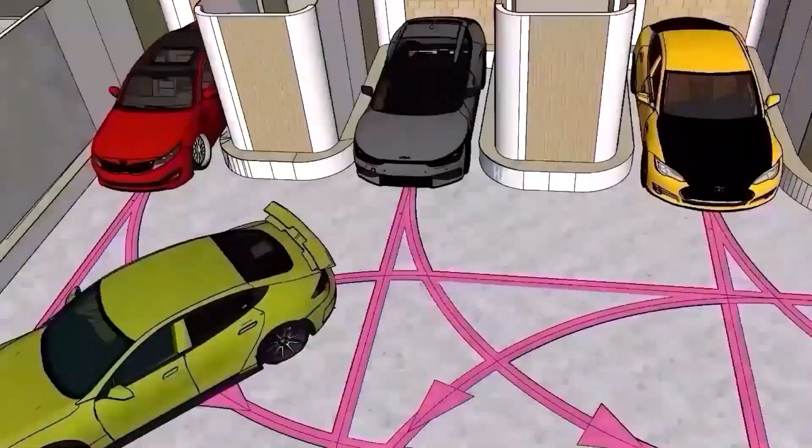A nonstop self-driving car that can solve traffic problems. All vehicles are automatically driven, and when the vehicle departs, they are controlled by the system. The number of people transported per hour is 160,000, three times that of subways.

It runs ultra-high speed in the city center, running 100 miles per hour non-stop through downtown New York. Self-driving cars are in the spotlight as a means of transportation for the future.

Famous companies around the world are scrambling to develop them, but they still lack perfection and lack legal support to determine who is responsible in the event of an accident. Also, even if it is possible to drive fully autonomously, it does not solve traffic problems such as driving fast.

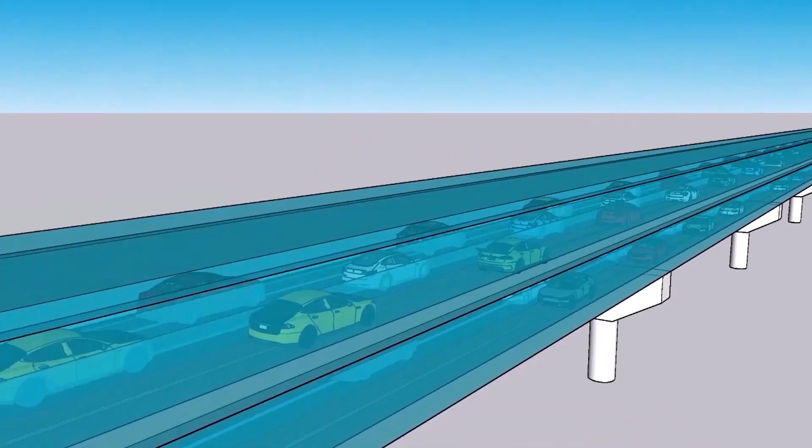However, a new technology has been developed which solves the commercialization of autonomous vehicles in a simple way. Advanced autonomous driving has already established technology. The new technology developed by Korean startup BT researchers is designed to allow autonomous vehicles to pass through dedicated passages with good straightness, and will be the first to succeed in commercializing autonomous vehicles as a technology that can drive non-stop at 162 km per hour, high speed in the city.

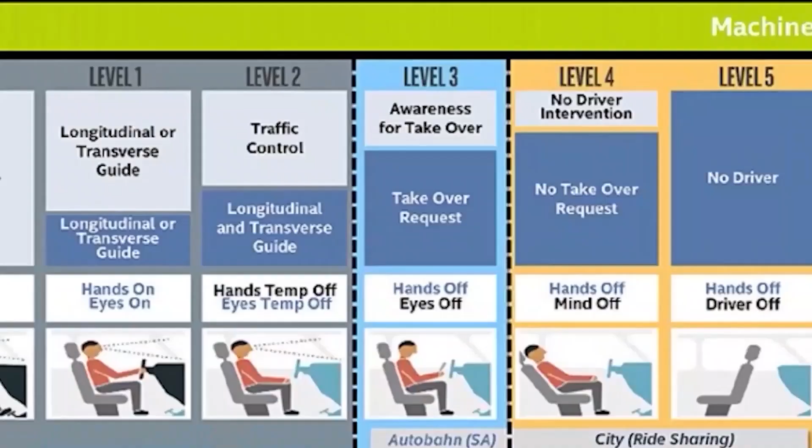The dedicated passageway to be built in the center of a large city is in the form of a tunnel, and there are few obstacles due to the closed top, bottom, left, and right. So autonomous vehicles with 4 stages of autonomous driving are operated at non-stop high speed.

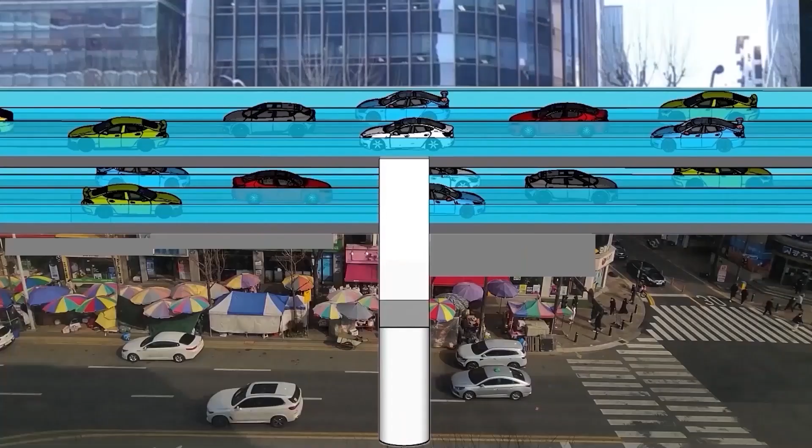Thousands of self-driving cars travel at non-stop 162 km per hour speed, transporting more than 100,000 people per hour on the dedicated passageway in the city center, commercializing self-driving cars.

Vehicles and populations in large cities have reached saturation, causing severe urban traffic difficulties. Can we solve traffic problems forever? Non-stop 162 km per hour in the city center.

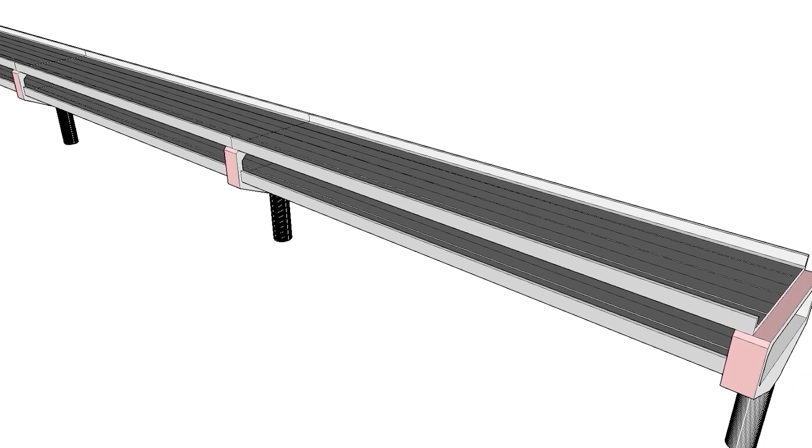Instead of the subway, a 2-story highway is built in the city center. The crossing directions are placed on the upper and lower floors, respectively.

In the city center, non-stop high-speed driving will be carried out at high frequencies. Cars that used to run at high frequency diverge to the branch line, stop, and get on and off.

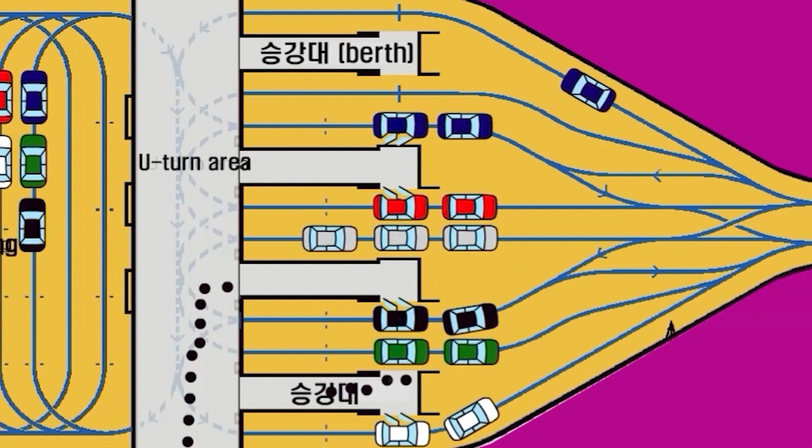Collisions and congestion are blocked in advance with artificial intelligence computers. Passengers get on the parallel platform and depart sequentially. Cars departing from the distributed terminal gather on the main line and operate at high frequencies.

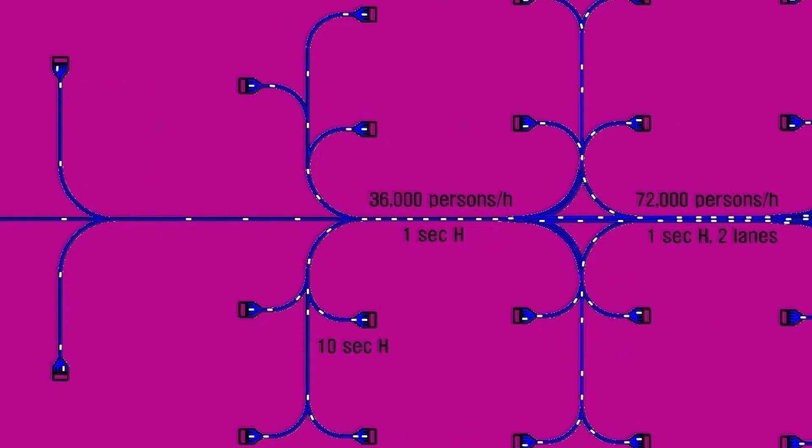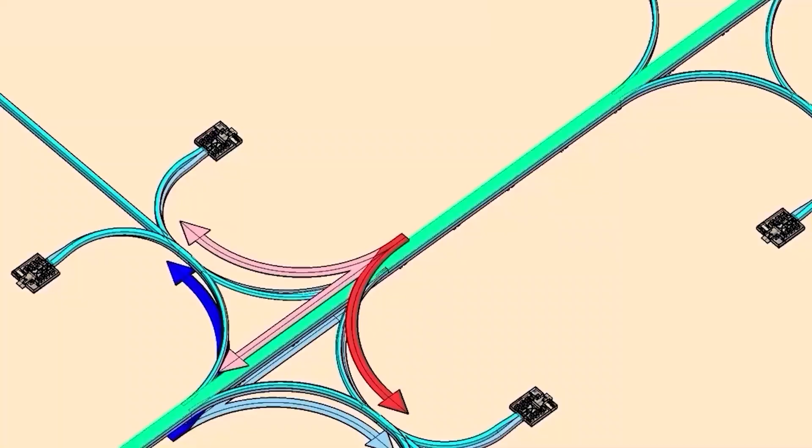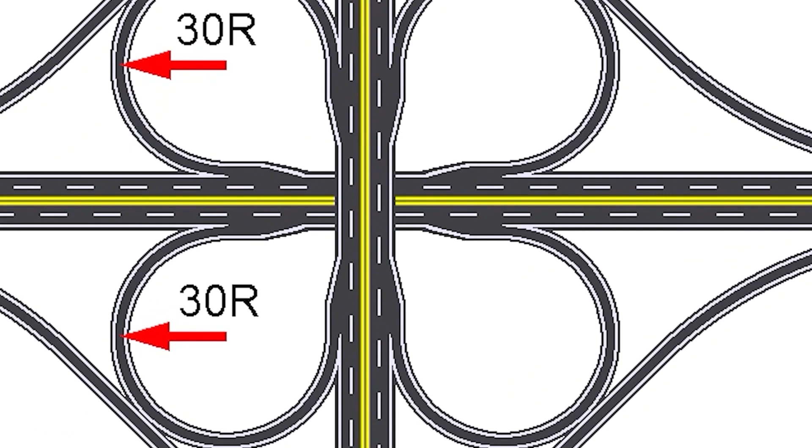The large interchange of the highway occupies a large site and cannot be installed in the city center. But the structure that is easy to turn left allows a large turning radius of the connection road, and the BT 2-story road can reduce the interchange by more than 20 times, enabling urban installation.

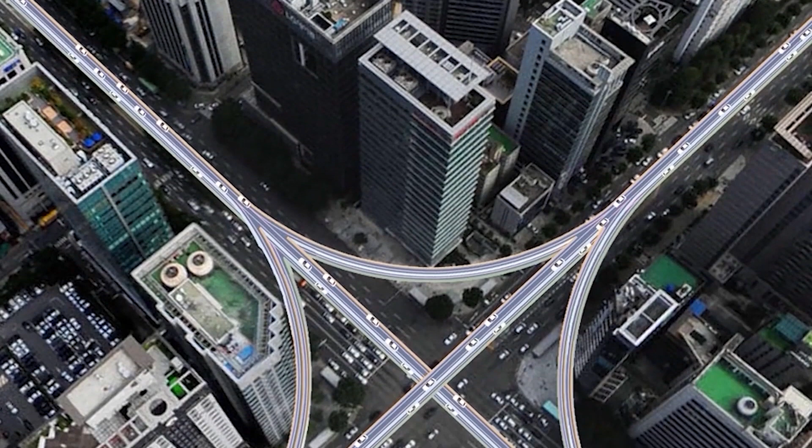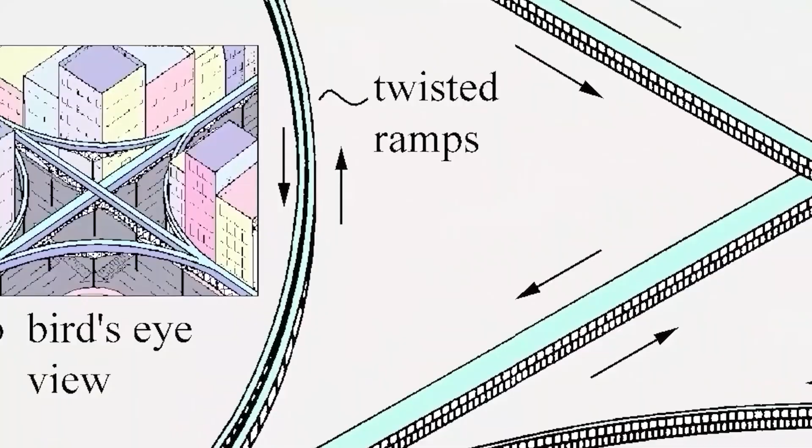BT installs a diamond-shaped intersection that fits perfectly into the intersection of the city center. Along the wide road in the city center of a large city, a 2-story road with many intersections is built as an elevated or underground road.

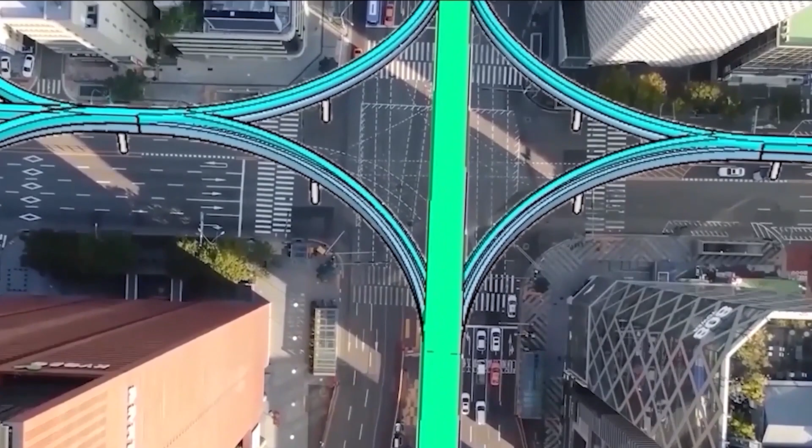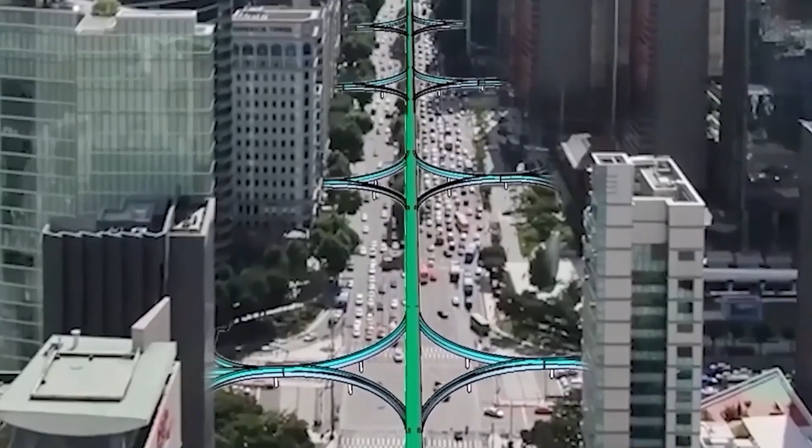Interchange with a large turning radius enables non-stop high-speed driving in the city center. All BT's cars will be operated as self-driving cars, and self-driving cars will be able to drive non-stop high speed in the city center.

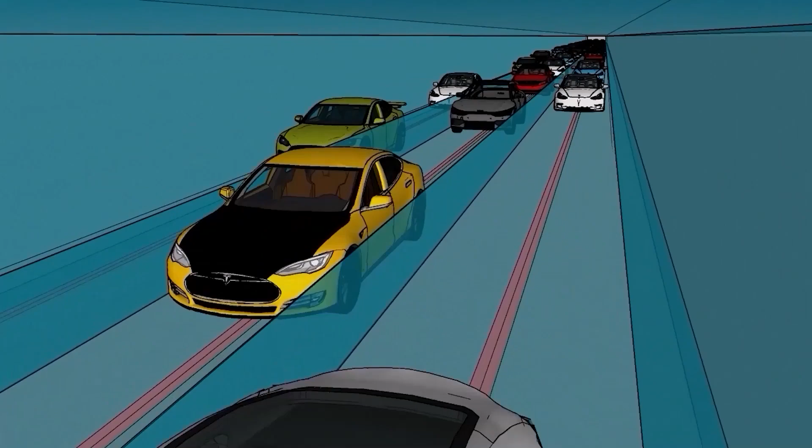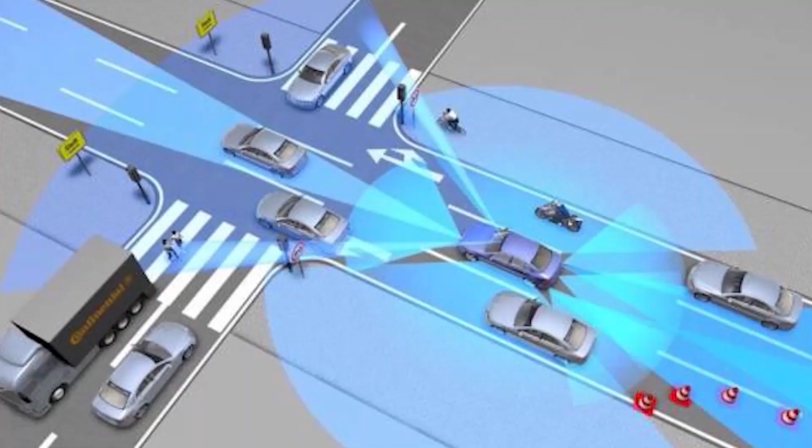Under the condition of a tunnel type that is closed up, down, left, and right, the autonomous vehicle travels in 4 stages of advanced autonomous driving. Later, even if the self-driving car becomes a 5-step, fully self-driving car, passengers are no better off than taking a taxi.

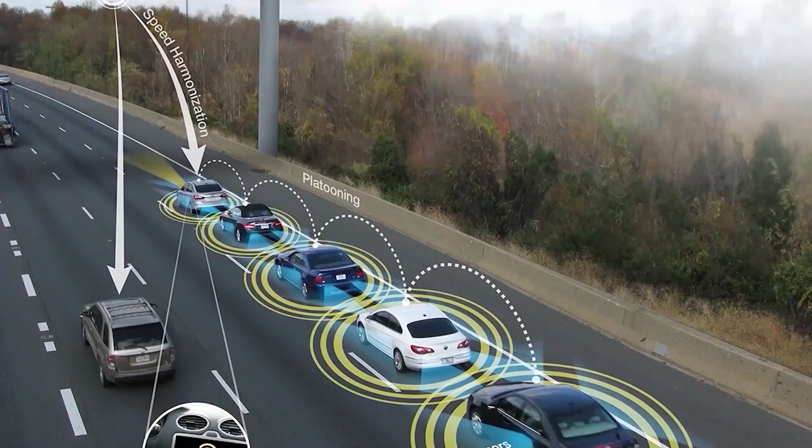There is one thing to look forward to only after self-driving cars are fully and widely distributed, which is shortening the distance between cars. According to a publication by the Korea Transport Institute, the operation of self-driving cars can increase road capacity by 6 times.

Self-driving cars have a short response distance, which can reduce the safe distance by 10 meters. Therefore, BT, which operates only autonomous vehicles, will be able to transport large amounts of people.

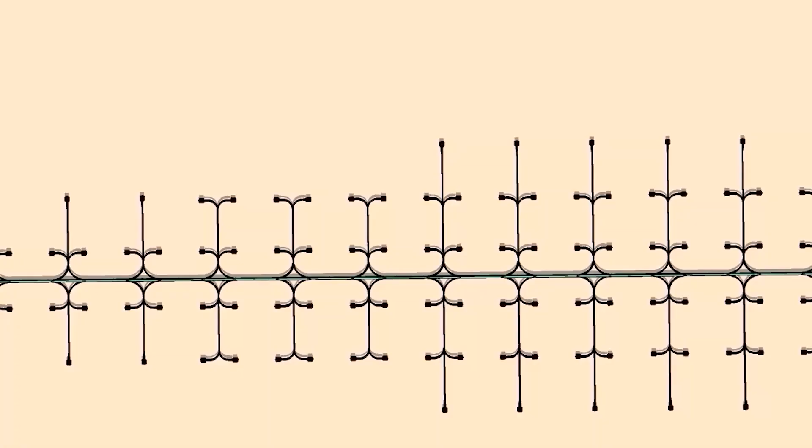Unlike subways, there is no subway station on the main line road, so non-stop high-speed running is possible. After high-speed driving, vehicles stop and get on and off at the terminal installed at the end of the branch line.

Connected to the interchange, such as a highway, self-driving cars arriving at their destination stop and get on and off at the platform of the terminal.

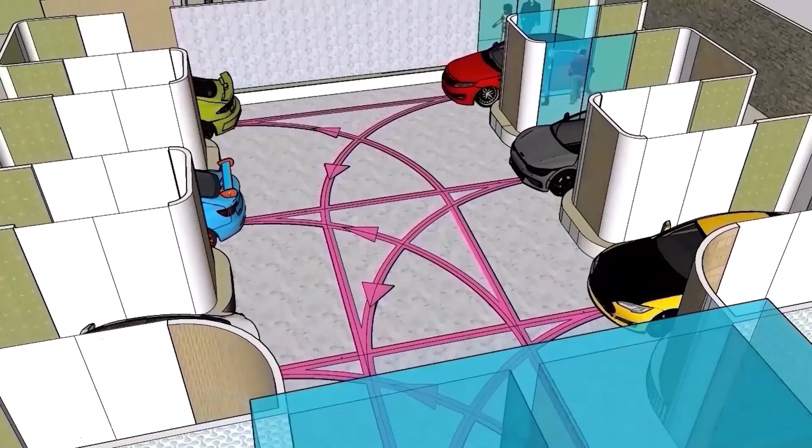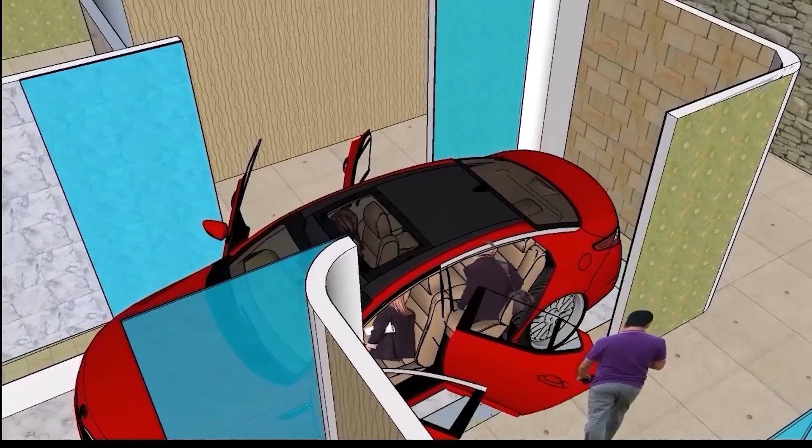Self-driving cars on the road cannot drive at high speeds in the city center, but they can safely drive at high speeds on BT's two-story road. All cars are autonomous without a driver and are controlled by the system when the vehicle departs. Up to 5 passengers with the same destination will join. Unlike highways, BT has a vertical crossing direction, reducing the installation area by half, and the entire section consists of one-way travel.

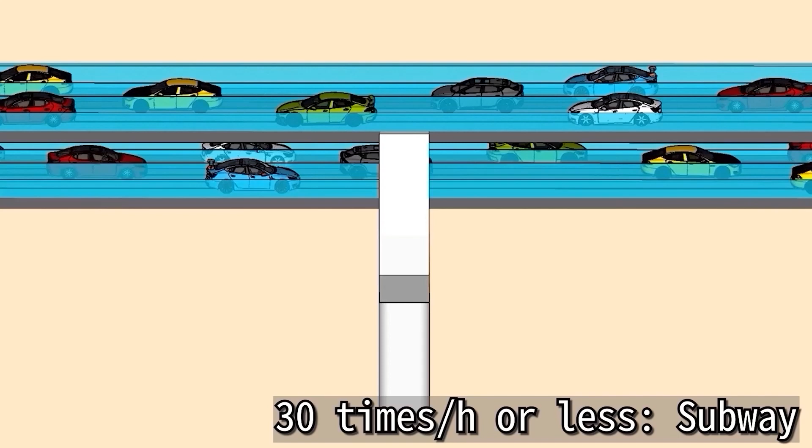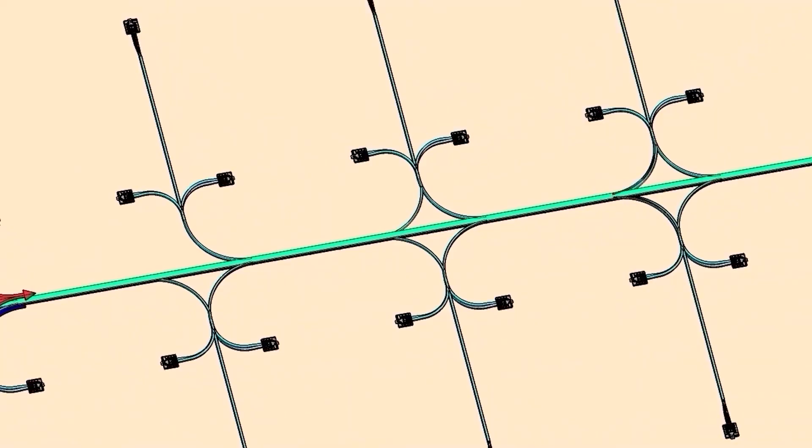Subway or light rail runs only less than 30 times per hour, so transportation is insufficient and efficiency is low. Unlike subways and light subways, two-story roads can operate at high frequencies, and several lanes are installed to provide high-capacity transportation. The lower floor of the two-story road branches off by a branch line, and the upper floor shows a structure of gathering from the branch line.

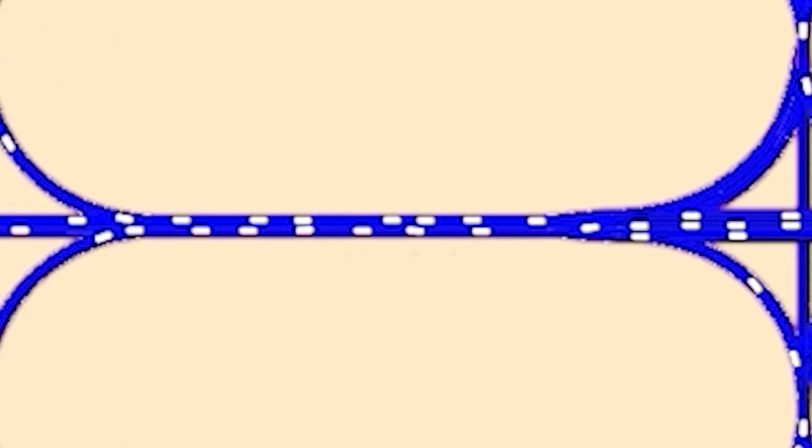Cars starting from numerous terminals on several branch lines enable high-frequency operation. Cars travel at constant speeds and intervals. On a one-way road that is sealed up, down, left, and right like a tunnel, and has few obstacles, cars drive non-stop at high speed as stably as on a highway.

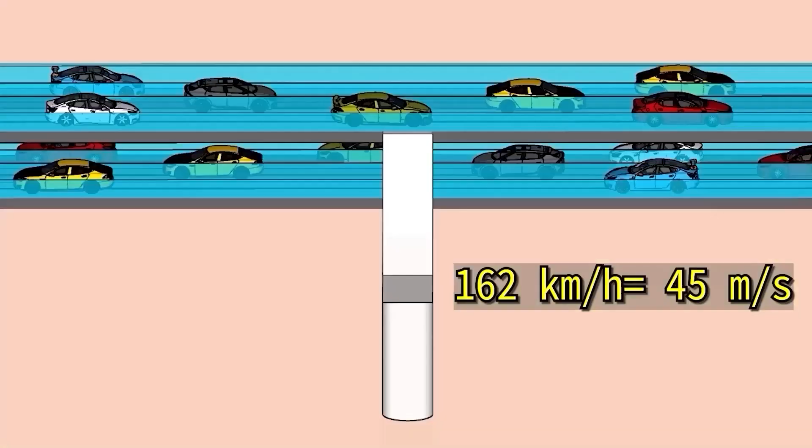In addition, since the straight road is good and the turning radius of the connection ramp is large, it can travel at 162 km per hour, moving 45 meters per second. If the cars run at intervals of 15 meters, 3 cars per second can be operated, and more than 30,000 cars can be operated per hour on 3 lanes. Multiplying 3 lanes by 3 cars per second by 3,600 seconds by 5 persons, it becomes 162,000 persons per hour, 3 times the transport capacity of the subway.

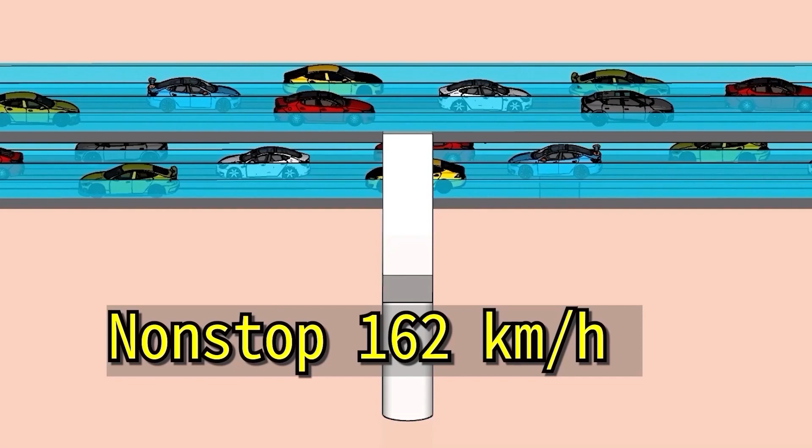In addition, it travels at the high speed of 162 km per hour, non-stop, allowing it to travel more than 4 times faster than the subway.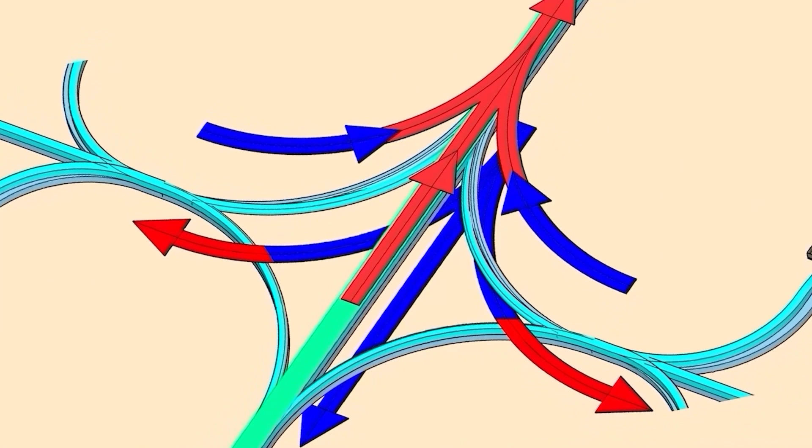One of the interchange connection paths must be connected in an alternating direction. The capacity of 150,000 people per hour is sufficient. But if you operate a 10-seater car instead of a 5-seater car, the capacity doubles, and if you narrow the driving gap in half, you can operate up to 600,000 people per hour with the same facility.

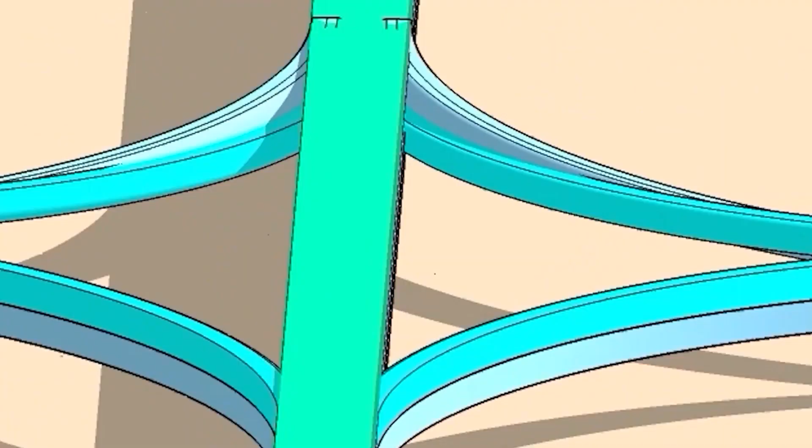There will be insufficient passengers to fill the capacity of up to 600,000 people per hour. So, the capacity can be adjusted to suit the traffic volume of the city being built. The number of terminals or vehicles can be increased or decreased from time to time during operation, and double-decker roads can be extended and connected continuously.

The big advantage of self-driving cars is that the distance between cars can be narrowed to a minimum because the response distance is short in the event of an accident, and braking is possible immediately. Self-driving cars will travel at regular intervals and speeds to have the best ride, and all passengers can move comfortably and refreshingly as they will be given seats.

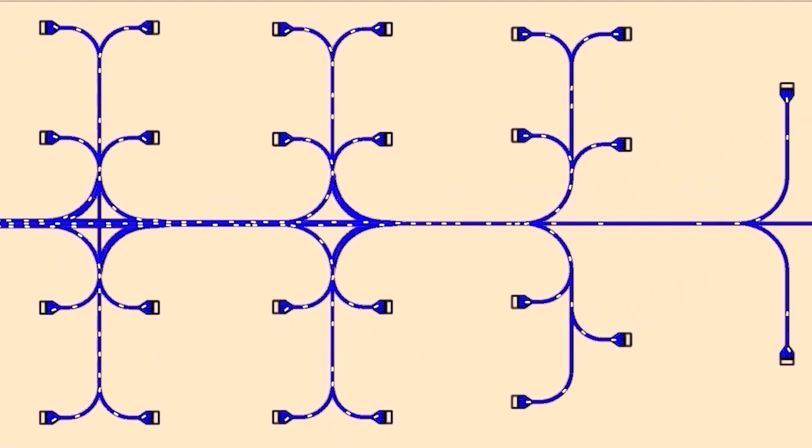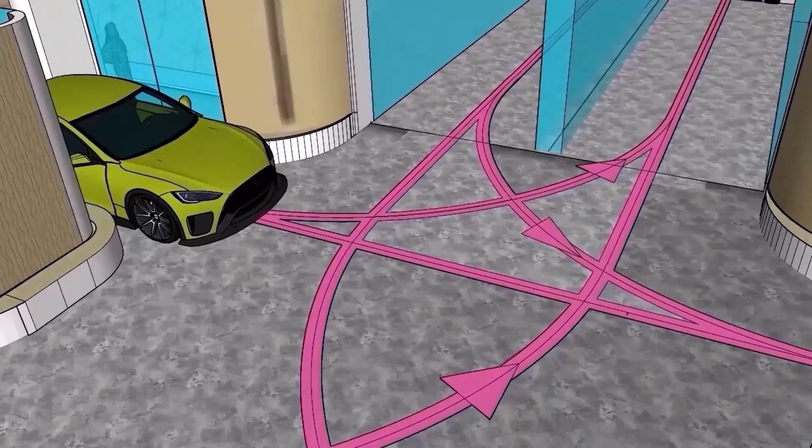All cars that used to run at high frequencies decelerate after branching to the branch, stopping at the destination terminal, getting on and off, and returning to the main line. When the car stops at the platform of the terminal, the screen doors and car doors open, the passenger gets off, and the cars depart for the next destination with the passenger on board, or as an empty car.

BT's two-story road is connected by 3-dimensional intersection with other routes, can be extended continuously, and moves non-stop anywhere like a highway. Continuous extension and expansion will eventually connect the entire city and all nearby cities.

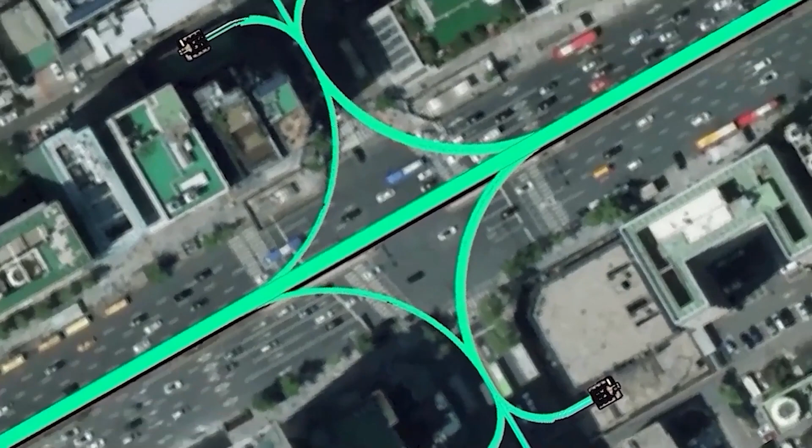BT's two-story road is preferentially installed in downtown areas of large cities with heavy traffic. It is recommended to build underground instead of subways, but elevated installations are possible, and elevated installations save money and time. The two-story road overcomes the disadvantages of accessibility and large interchange sites, which are the disadvantages of highways, and specializes in urban installation.

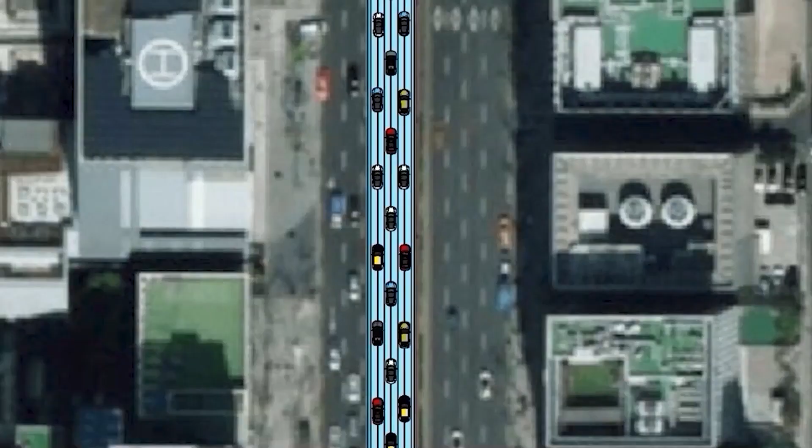Cars driving at constant speeds and intervals are very stable and relaxed. Safety partitions are installed between lanes, and the top, bottom, left, and right are sealed, so there are few factors that interfere with driving within a two-story road, such as a tunnel. The only obstacle is the front car in real-time communication. Cars in the opposite direction are always driving downstairs.

All cars run during rush hour. Parking, maintenance, car washing, and charging are performed during free time, and cars are always waiting for passengers to get on.

BT's two-story road is built in the center of a wide road in the city center, built above it, or underground. If branching on the lower floor of the double-decker road, it merges on the upper floor. And the more branch paths there are, the greater the usefulness. New transportation featuring branches, and many branches.

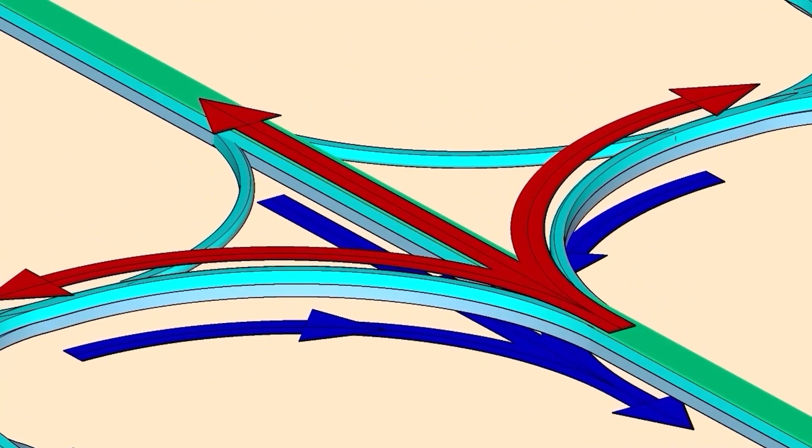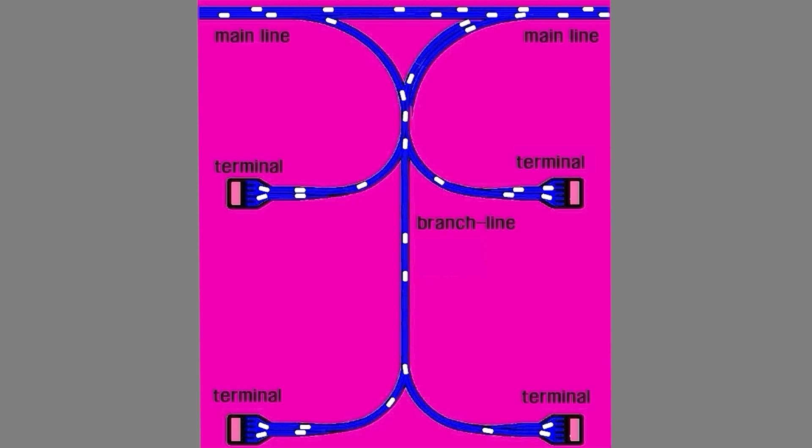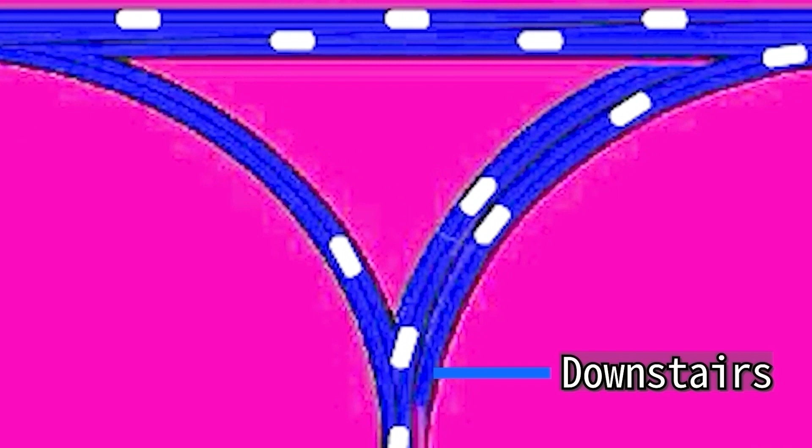BT, bulk transportation. The branch stop method improves the shortcomings of railroads or track methods that operate at extremely low frequencies of less than 30 vehicles per hour to stop at the stations, and is already driving high speed and high frequency through such a structure on highways. Cars to stop and cars to drive at high speed are divided through interchange, and cars branching to their respective destination terminals stop.

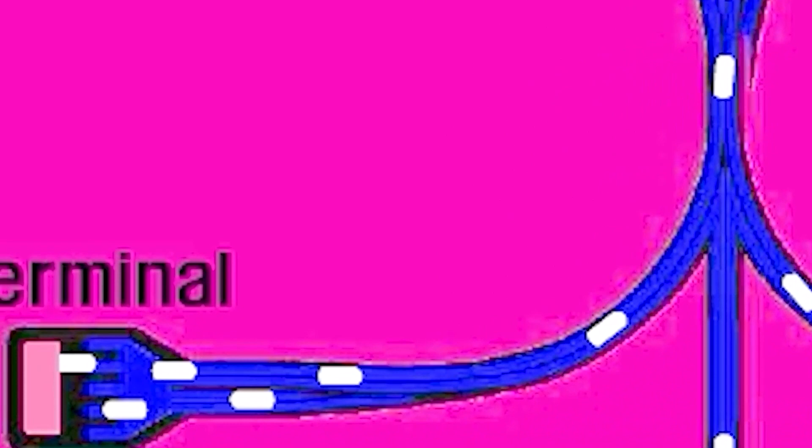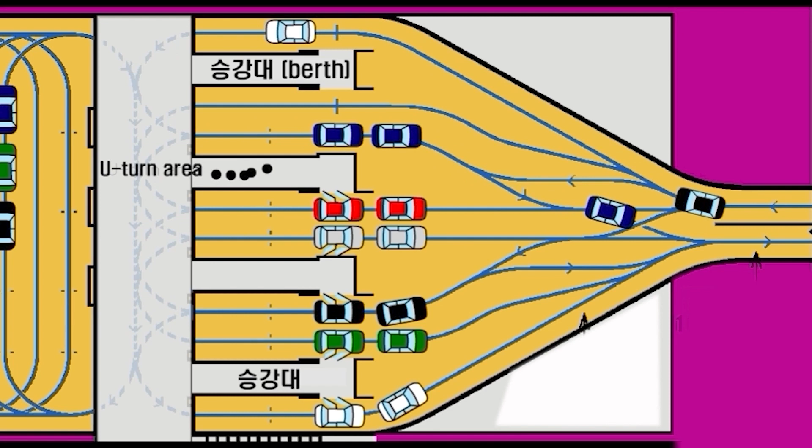Passengers get off or get on. The terminal has several platforms arranged in parallel towards the main line, so cars entering in succession stop sequentially and can also start continuously. The cars change direction in the U-turn area and go back to the main line through the upper or lower floors of the road.

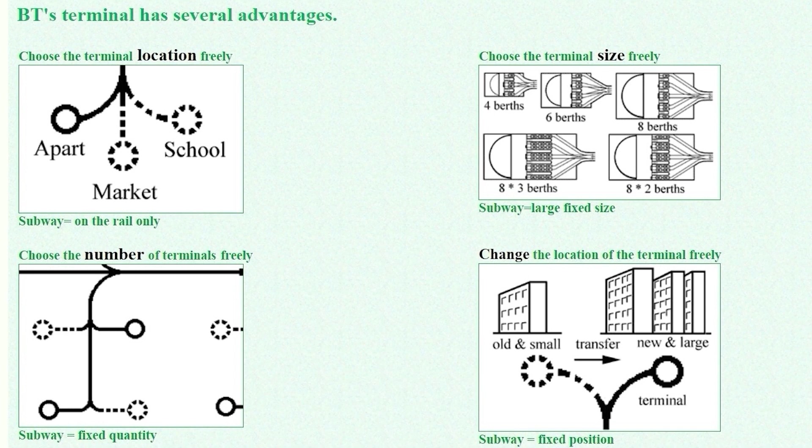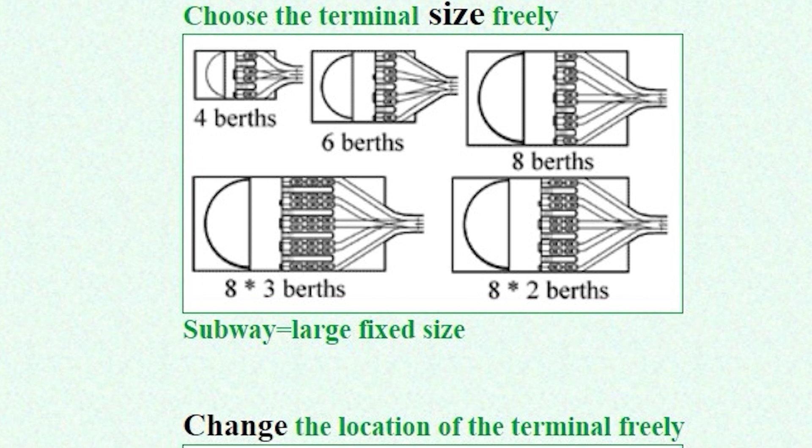Compared to subway stations, small terminals of 1/10 to 1/100 size are installed at points of traffic occurrence in various shapes and sizes. Terminals are selected in size according to the amount of traffic generated, from 4 platforms to 24 platforms, and are mainly installed in places with good accessibility. Flat terminals can also be installed in narrow spaces of 30 square meters or less, and can also be installed outside the building.

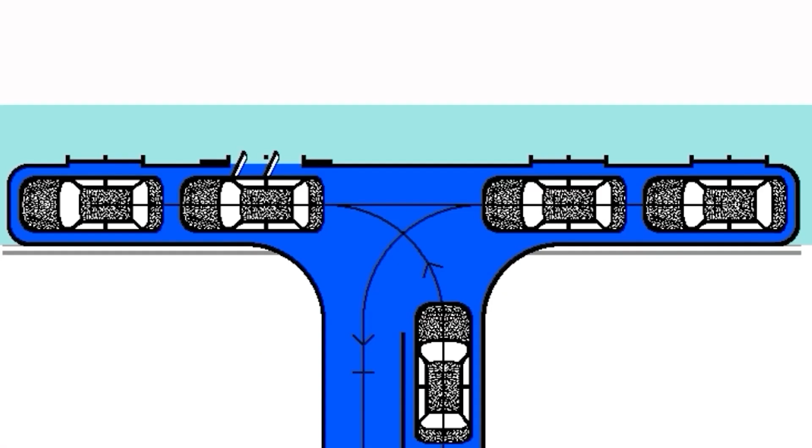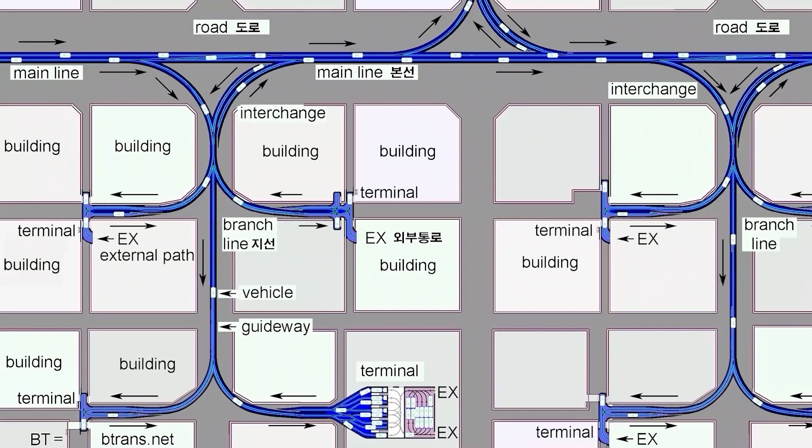Terminals are usually installed in front of elevators or apartment complexes in large underground parking lots. That is the easiest place to access by extending branch lines. Small buildings can also connect almost all buildings in the city to the BT transportation network by installing one terminal per 4 buildings. Passengers can use it after getting off at the terminal, taking a linked transport car, moving to the final destination, and also going back to the terminal.

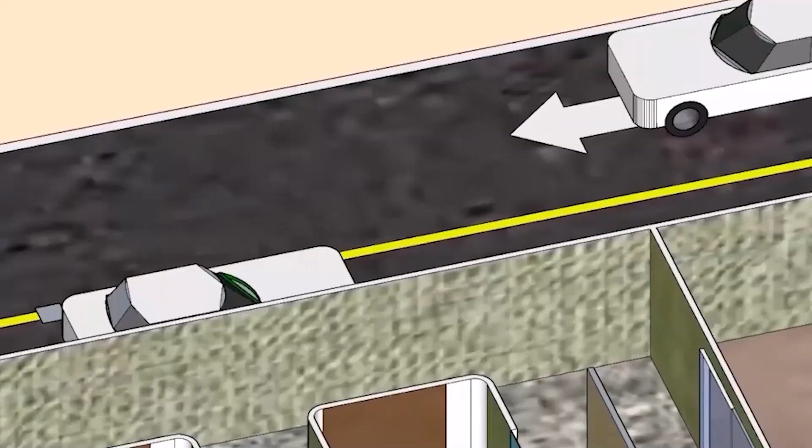You can go by car parked in the parking lot, and in addition, you can use bicycles, kickboards, scooters, carts, and rental cars to realize a door-to-door service that moves directly from door to door. In particular, private cars that have been approved in advance among private cars can pass through the dedicated passageway and go anywhere.

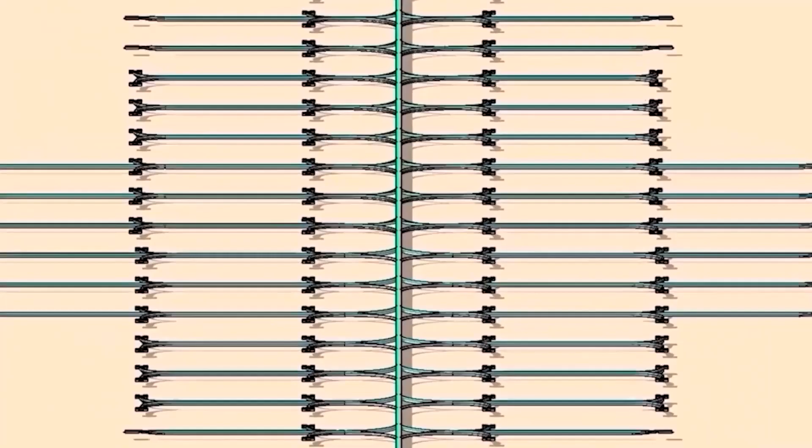The technology of driving a private car at high speed using guideway is a long-awaited, very desirable technology. The average speed of downtown Seoul is less than 30 km per hour, and the technology to drive non-stop at 162 km per hour by car is a tremendous technological advance.

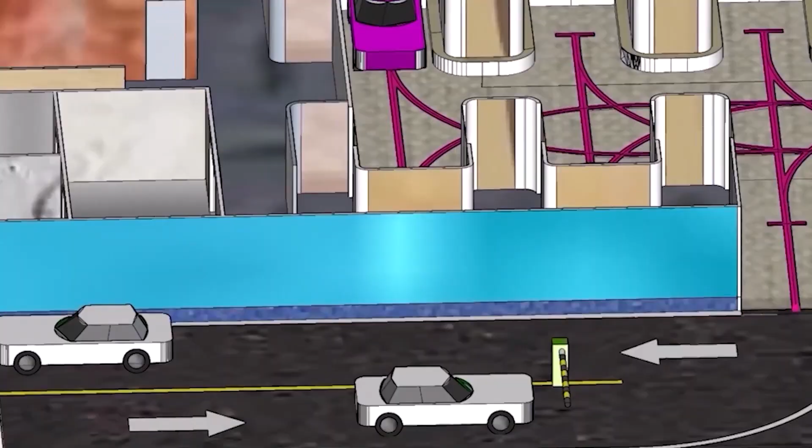Mass transportation systems are built underground. Automatic driving electric vehicles are operated on a 2-story road underground in a large city. BT is also the best condition for operating hydrogen cars. High-frequency operation on the underground 2-story road will transport many passengers.

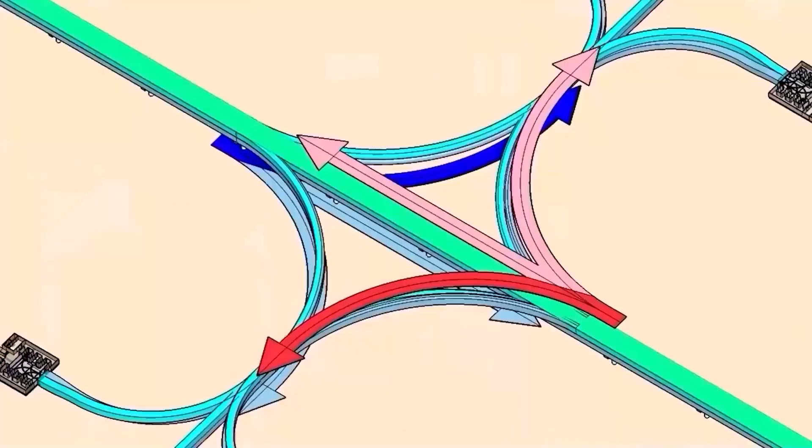A summary of the technology of the high-speed, high-capacity urban transportation system, BT, is as follows. First, a highway is installed in the city center, so you can drive non-stop fast. Second, the highway was improved to the second floor, making it easy to turn left, and the interchange was miniaturized. Third, many interchanges and terminals were installed to enable high-frequency operation. Fourth, due to the operation of autonomous vehicles, the inter-vehicle distance was reduced and it became a high-capacity transportation.

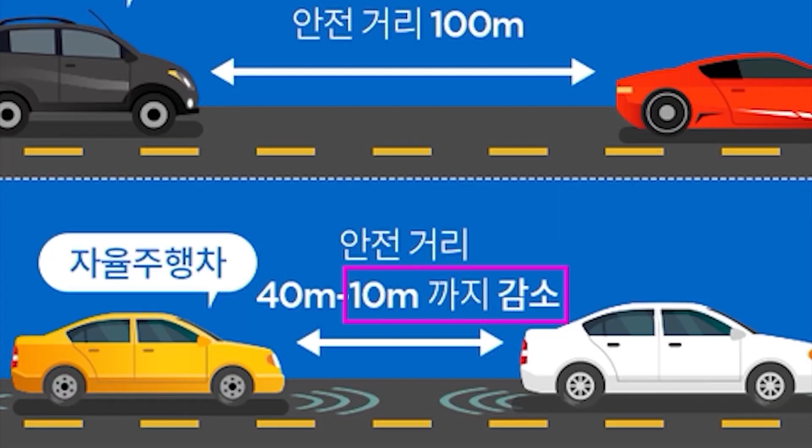In short, the highway was installed in the city center, and self-driving cars were operated, making it a high-capacity means of transportation due to high-frequency operation: expressway, self-driving car, high-capacity transportation.

BT's terminals are distributed and installed in places with high traffic and connected to the main line through branch lines. On a one-way road with few obstacles other than the front car, in real-time communication like a tunnel, reducing the driving gap in half doubles the transport capacity, and doubling the number of seats from 5-seater cars to 10-seater enables transportation of up to 600,000 people per hour.

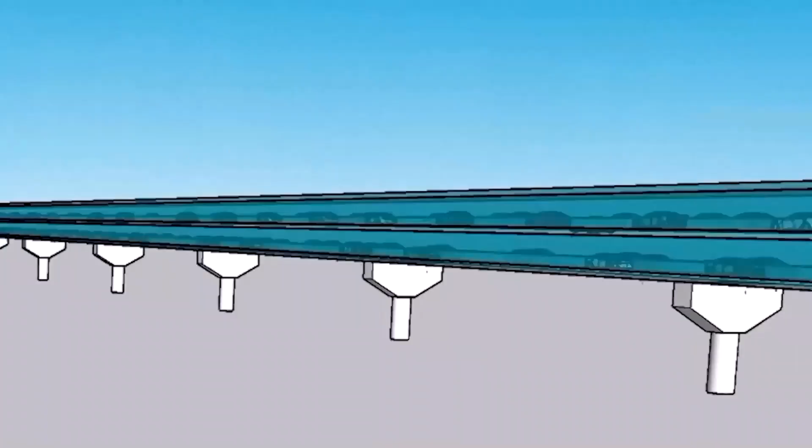Even if the capacity is 600,000 people, it is operated according to the traffic volume, so any city can have more facilities than the traffic volume.

For example, if you build a facility that can transport 1 million people a day with a construction cost of $2 billion, you can recover your investment within years of mass transportation and make a big profit, which will be more competitive than other transportation that does not run 30 times per hour, and spread rapidly around the world.

Therefore, traffic jams in many cities around the world will be alleviated. The construction of a new high-speed and high-capacity transportation method, BT, will resolve urban traffic difficulties, and housing and parking difficulties can also be resolved.

In addition, air pollution will be reduced, and urban competitiveness will be greatly improved. Also, citizens who suffered from commuting every day will travel comfortably and quickly and will get precious time every day, about 2 hours a day.

Terminals are installed mainly in places with high traffic; separate stations can be built, but they are small in size and likely to be installed in underground parking lots of large buildings. Terminals can freely select size, location, and installation timing. In particular, terminals will also be installed in apartment complexes, increasing the value of apartments, buildings, and land where installed. If BT is built in a new city near Seoul, it can reach Seoul Station within 10 to 20 minutes, solving traffic problems.

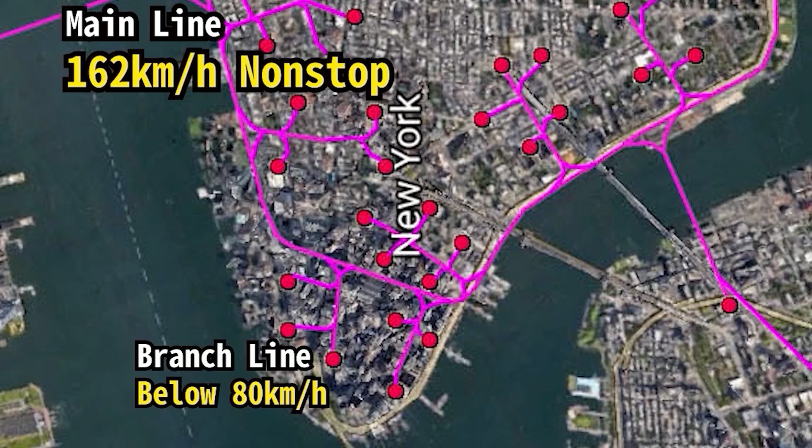New York, one of the largest cities, has many tall buildings and is densely populated. The high-speed, high-capacity BT will quickly transport a large traffic population through the main line, which can travel at 162 km per hour, and the branch line, at less than 80 km per hour. It can reach JFK Airport within 8 minutes.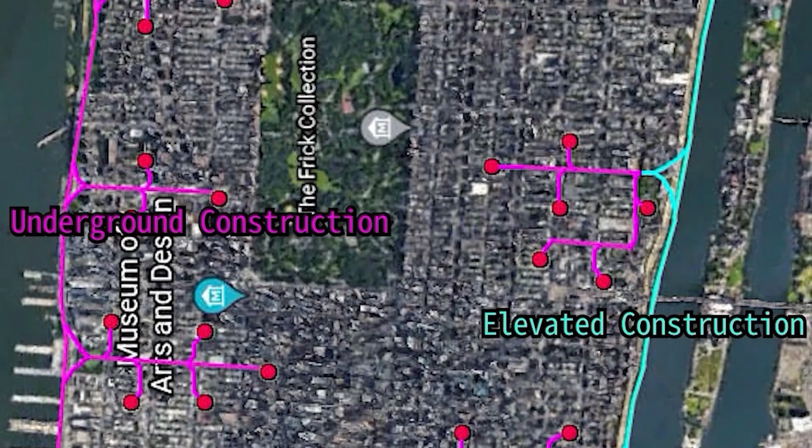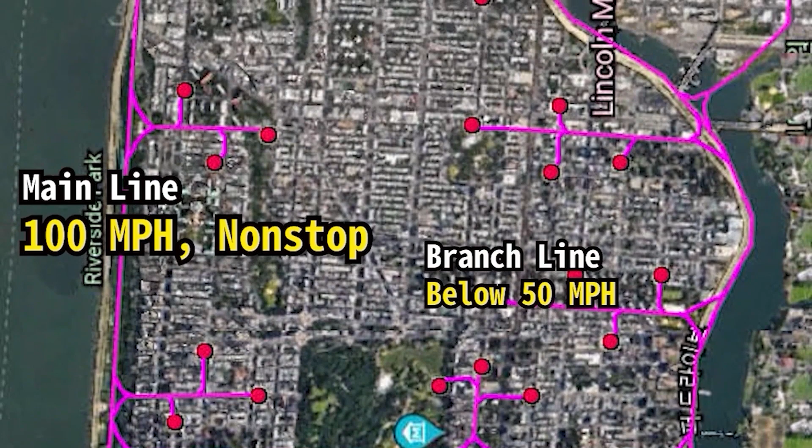The main line is constructed underground along the riverside, with bicycle paths or an elevated road also constructed to operate at 100 miles per hour in downtown metropolitan areas, enabling traffic congestion relief. Branch lines below 50 miles per hour allow passengers to easily access high-speed transportation.

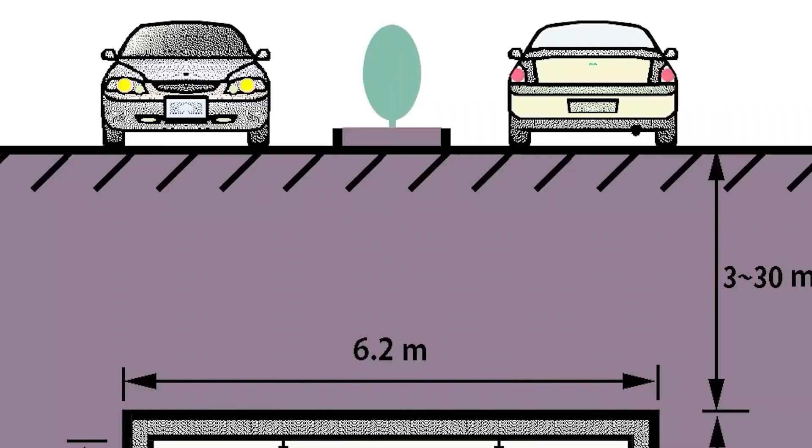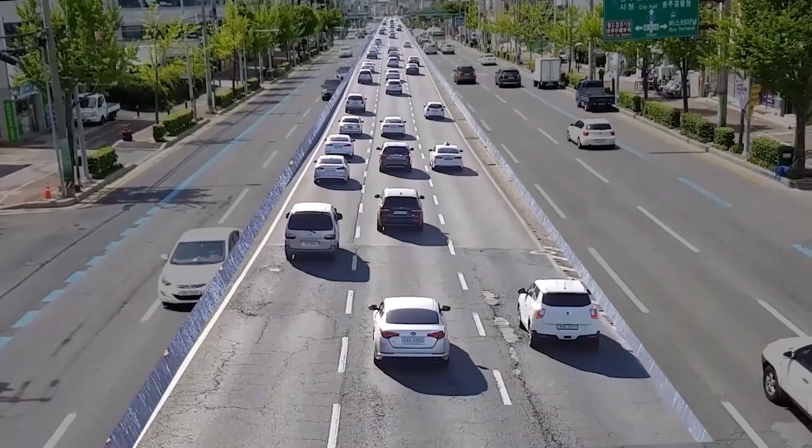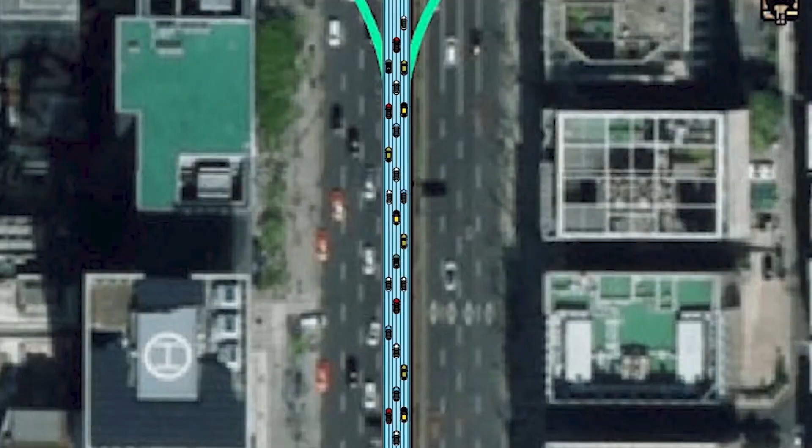Out-of-town areas have good straightness, so the speed can rise to 300 km per hour. In addition to the underground or overpass of urban roads, BT can be built along rivers, cycle routes, vacant lots, sidewalks, parks, green areas, and underlying buildings. A 3-meter-wide lane road can pass deep into a narrow alley and connect to places with heavy traffic.

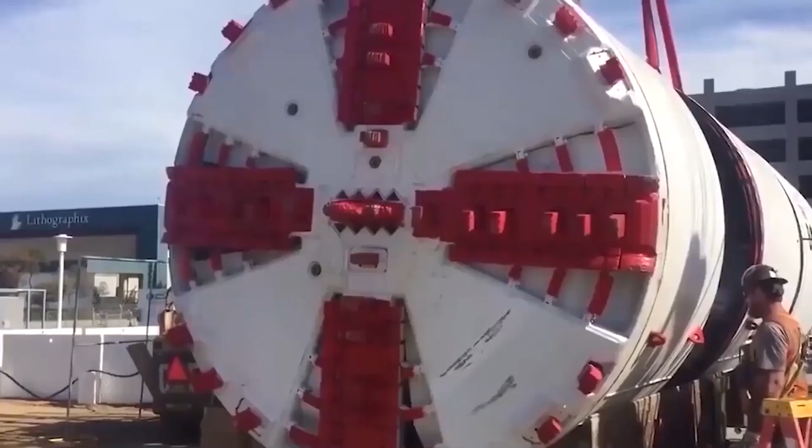It is said that tunnels for car movement are recently being dug in the basement of western U.S. city centers, but it is not easy for cars to climb up and down in elevators, especially the section returning to the congested road, and there are many structural challenges to overcome.

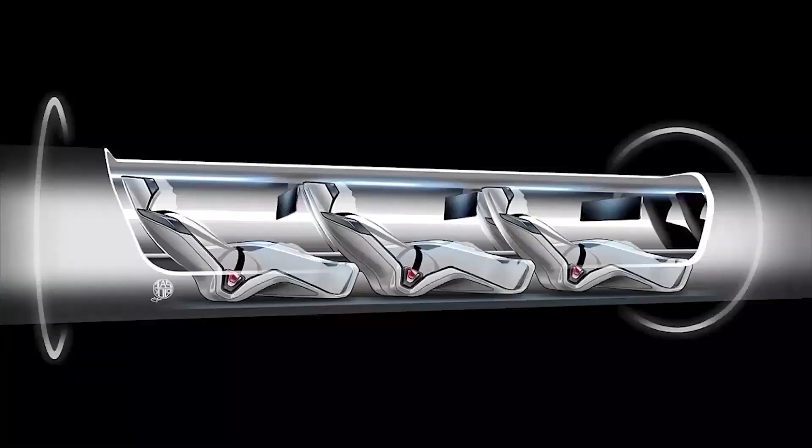Hyperloop, flying cars, and self-driving cars need a lot of research in the future and are far from practical use. Even if such technology is completed later, it will not alleviate traffic difficulties in the city center. However, BT is an overpass or underground road with no difficult technology, so anyone can build it immediately, leading to a rapid easing of urban traffic difficulties. Running on a dedicated passage is similar to a slot car, so there is no need for difficult technology.

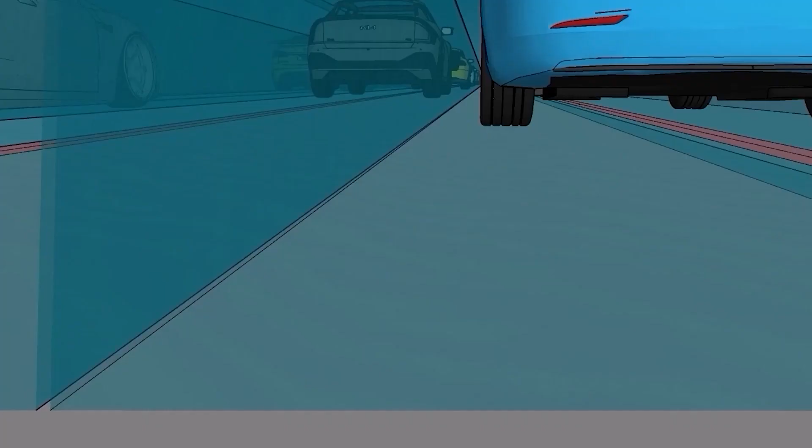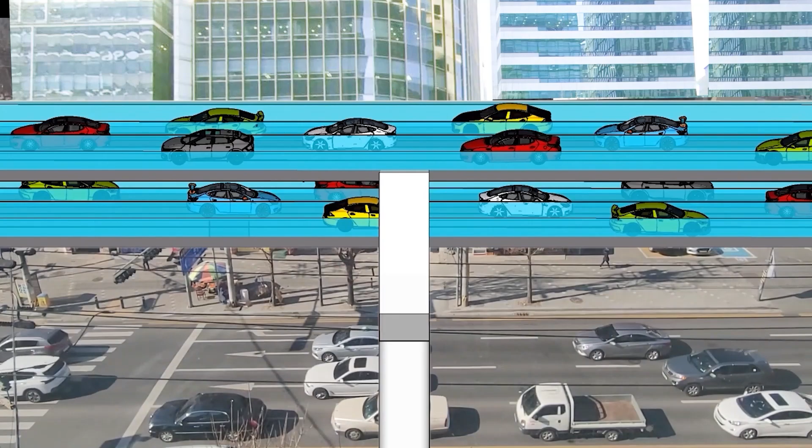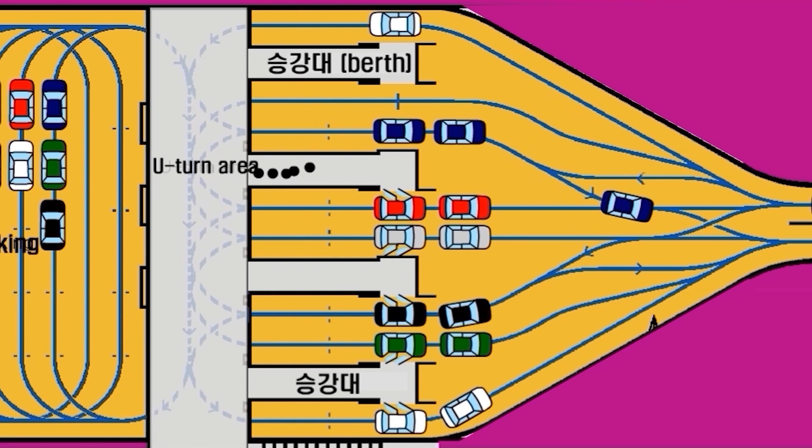Mass transportation can be verified in 3 stages. Step 1: Is there a non-stop high-speed driving facility in a place with heavy traffic? Step 2: Can all cars running at 2 levels, continuously for 1 hour, at high frequency, stop safely? Step 3: Is it possible to continuously start cars to run at high frequencies for more than an hour?

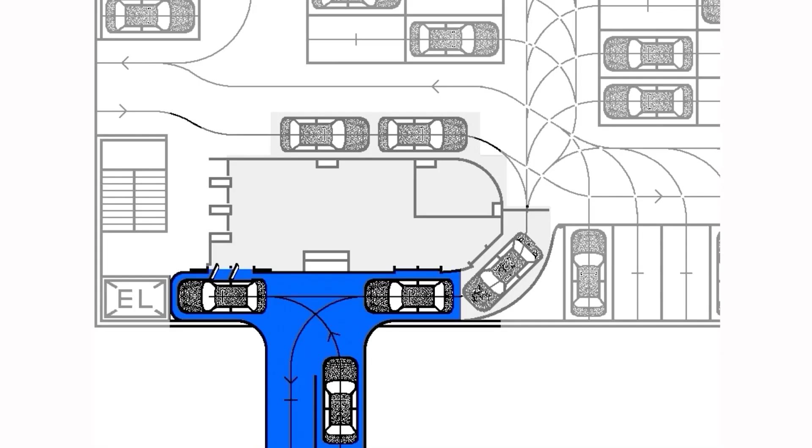BT will replace transportation in cities around the world with advantages such as 24-hour waiting, minimum noise vibration, real-time delivery, and almost free delivery, continuous expansion, and driving on double-decker roads. Your private car can also pass through BT's two-story road.

BT Run. High-frequency operation enables high capacity and high efficiency. High capacity and high efficiency are also possible with high profits and low fares, enabling a virtuous cycle of mass transportation.